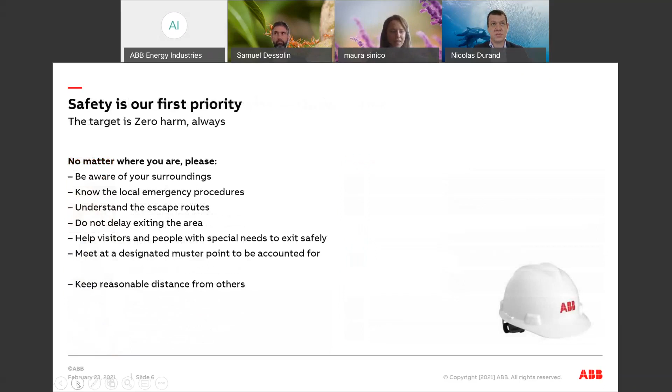Before introducing this formulation and blending tech talk, I would like to introduce very briefly ABB Energy Industries, as we are part of this division. ABB Energy Industries has the mission to support you in safe, smart, and sustainable operations through solutions that digitalize, automate, and electrify industries. We are in charge of 4 domains: oil and gas and chemicals, conventional power, alternative energy, and water infrastructure.

And on these markets, we support our customers on an offering portfolio which is quite wide, and that we will describe in more detail on the next slide.

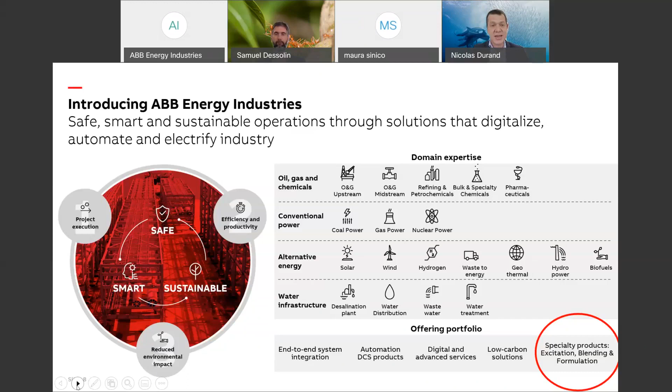So for this market, we can propose and support our customer on integrated systems and solutions. You probably know our capabilities in terms of electrification, control, telecom, and digital. But we are also a leader in automation control systems, where we can propose different kinds of solutions according to your process and according to your market.

We can support our customers whatever their typology—end users, EPC—but also through different channel partners that have been identified according to the different markets.

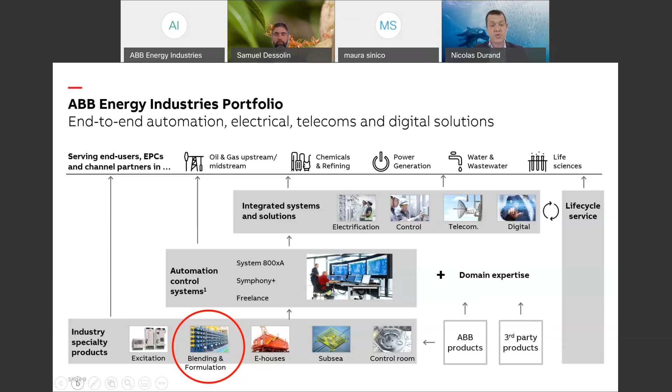In addition, with this integrated system and solutions, we also have some very specific capabilities in industry specialty products. For example, excitation, E-houses, subsea, control room, and of course, blending and formulation, which we will describe in more detail in the coming tech talk.

If we introduce now the Cellier Blending and Formulation solutions, we have been part of the ABB organization for about 20 years, but we have 60 years of experience in this kind of business. Since that time, we provide expertise, proprietary technologies, and our experience to design, engineer, assemble, and commission complete solutions and process control systems. Our solutions can be provided as standalone units, but also as complete integrated systems in the markets of lubricant and grease, paint and coatings, specialty paper, and chemical industries.

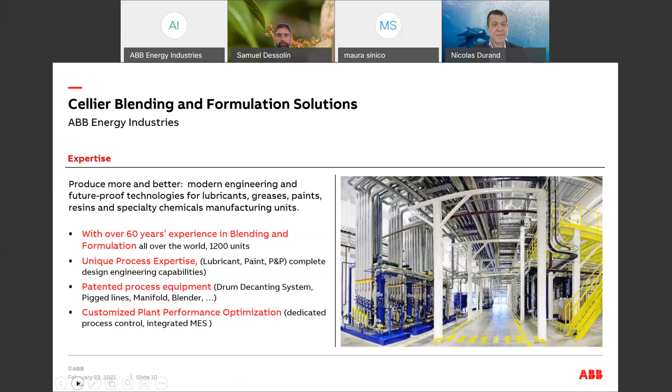Today we will go through the journey of presenting the ABB offering around blending and formulation expertise. Here we have summarized the different topics that we will address.

The heart of the plant is this process knowledge that we have with our engineers, batch or inline processes. We are capable of providing you with our own in-house solutions, but also we listen to our customers, to their process engineers or their own licenses, so that we cope with your needs, integrate your specificities, and deliver a full solution.

We'll touch base also on the after-sales service, which is important in the life cycle management of your industrial asset. And of course, we provide fully automated and instrumented plants to have an overall control on your process. We'll also touch on our digital module called ABB Ability Plant Performance Optimization.

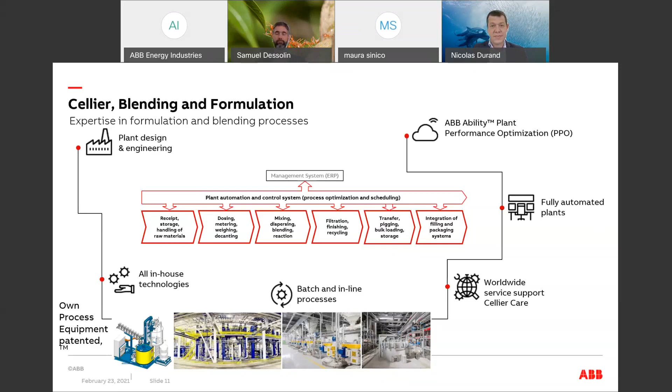On this slide, I won't spend too much time, but the idea was just to show you some examples of the many references that we have worldwide. We have more than 1,200 units built worldwide in the different markets that we serve. So here are some examples of the customers with whom we have worked and the markets on which we have been involved.

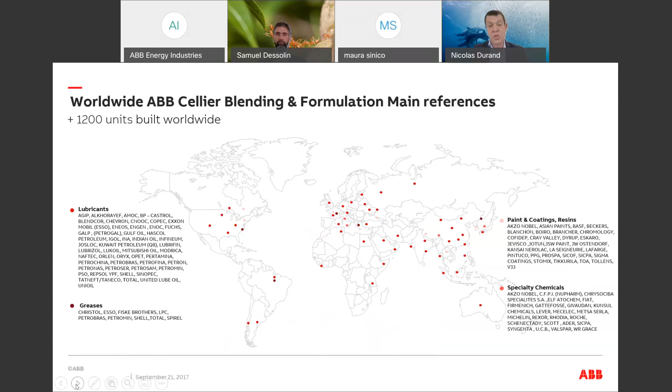What is important there, as you can see, is that we are global. It means that we can support you, whatever the localization of your plant or your project.

To continue the journey today, we will first touch base on our engineering capabilities. Basically, we are here to support you all along your project life cycle, and it's particularly true in the early engagement phase that we mentioned here.

Whenever you have a decision on an investment to be done, whether a brownfield or a greenfield project, we can be your partner from the beginning, for example at the conceptual design phase or at the FEED or basic engineering phase, to address with you your technical or financial challenges.

For example, identifying the risks, defining an overall project schedule, working on the different technologies that we can provide or select with your teams. And also on the financial aspects, define the return on investments or phasing your project in different steps so that you get the best out of your investment.

Then in project execution, during this phase we provide our detail engineering for the own equipment that we supply, but also for the rest of your plant, particularly in partnership with your other vendors or your EPC contractor, to ensure a smooth collaboration and a smooth project execution.

We also have some competencies to be your partner for the certification processes, for example in different countries, in Europe for the CE marking, or in the US, or in Russia, or China, or Korea. We provide you all the documents that are necessary for you to get the authorities' approval.

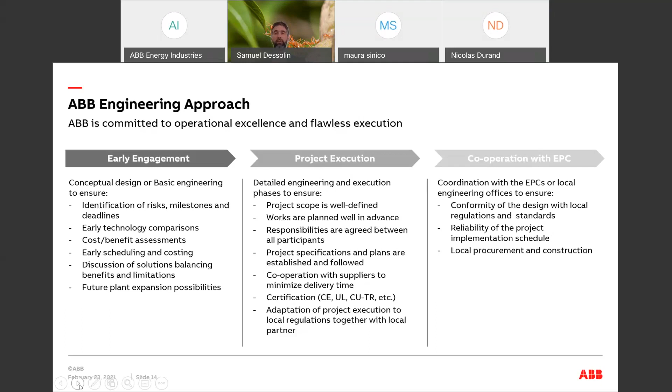We are also keen on applying the local standards, either thanks to our ABB local representation, or as seen on the right-hand side with the EPC or the local subcontractor, we adapt our design to the local norms and regulation. We also integrate as a team together with our end customer and the EPCs for the implementation of the project schedule. Now we'll go more in detail into our engineering approach.

Basically, all our solutions are usually skid mounted or even modular solutions.

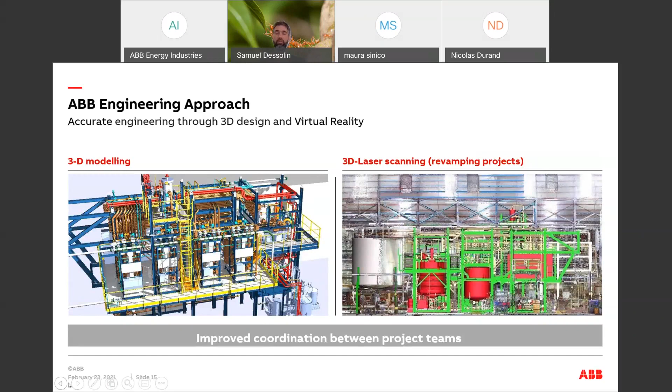This is done before starting the manufacturing of the skid. So it's a good way to control the design and be sure it will fit for purpose on your existing facility.

We also have, in France at our center of expertise, a workshop facility where we can manufacture equipment. The idea is to be in the innovation and R&D field, to promote and propose very high quality technical solutions. Having the engineering office next to the workshop is a better way for us to integrate and develop our innovations.

We also have a testing facility, particularly dedicated to improving or fine-tuning our products, and to run tests to define the performances we will meet in our contractual engagement.

Here it's in final stage in our subcontractor workshop. Again, it's all included with the pipes, the instruments, cabled and wired, even with the electrical cabinets, the MCCs or the VFDs. So it's a way for the customer to do an acceptance test in the workshop, to test the I/O, and to test the on-off and motor rotations.

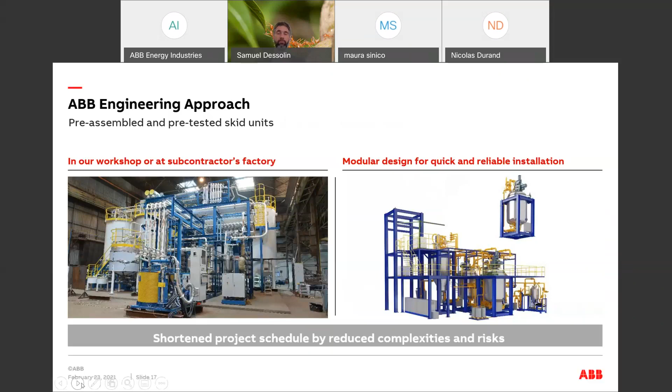And then afterwards, this is disassembled, packaged, and shipped to site in containers. Easy to transport, then reassemble at site with your EPC or local subcontractor under the supervision of the ABB team. So it's a way for you to construct safely and with limited risks at site.

This is both to supervise the installation of our own equipment, but also to give you advice and added value for the overall construction—having checklists, checking quality or timeline, or even raising punch lists—so that you and your EPC contractor can smoothly construct your facility.

Then on the right-hand side, for commissioning and site activities, we delegate our people to ensure a smooth startup. It's also a way for your people to get trained on the field, hands-on with the equipment and the control system. So that's for the engineering capabilities.

Here we have captured in this slide the overall project management capabilities that we have put in place for many years, and that we have accelerated now with more and more modern ways of working.

So here, just to summarize, the traditional way of project execution really has sequential phases: design, execution, and operations. Now we have captured the best of the Cellier know-how and ABB competencies to run this ABB adaptive execution.

So it's basically based on some collaboration up front during the design phase between the different ABB teams in the local country with the French experts, also together with you or your EPC, by organizing some key milestones during the project execution, like the hazard reports or hazard reviews, like the 3D reviews that we can now also run virtually, no need to meet all together in the same place.

And it's even more important with the travel restrictions that we have right now. The digital aspects are also, for example, for our control system. Again, we can run what we call remote FAT. We also have a simulation mode so that we can test our control system with a simulator of the process and how the plant will react at site.

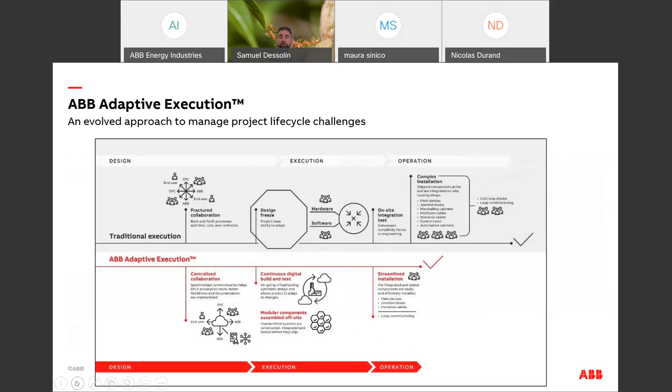And for sure, the modular and skidded type of construction that we propose is a key advantage for you for your site activities. So now that we have dedicated some time to engineering and project management, we want to focus on our offering. What project, what product, what solution, what can we offer?

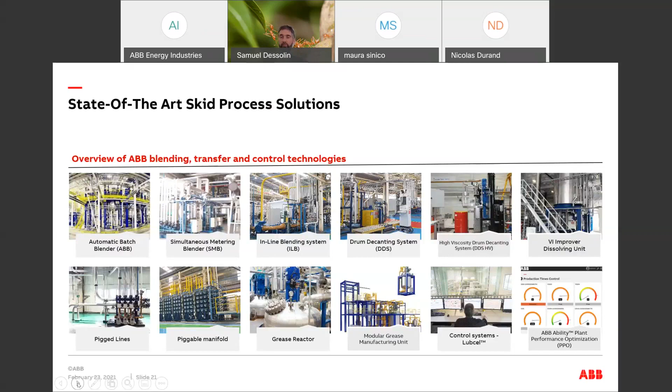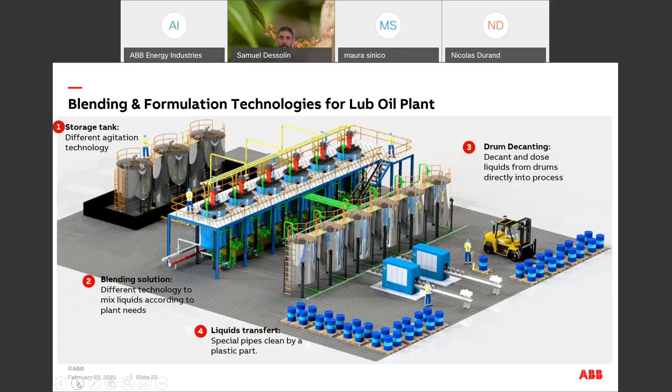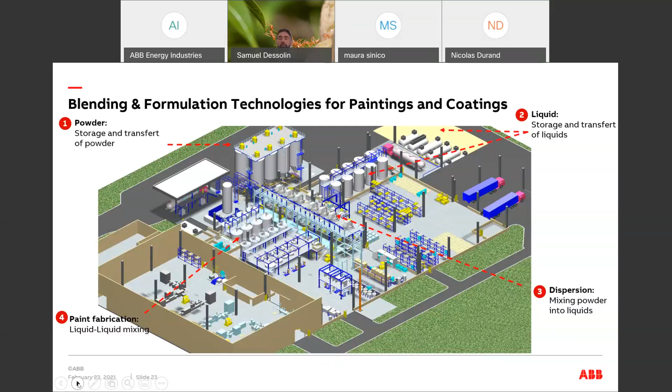All those plants for sure are controlled by our dedicated control system.

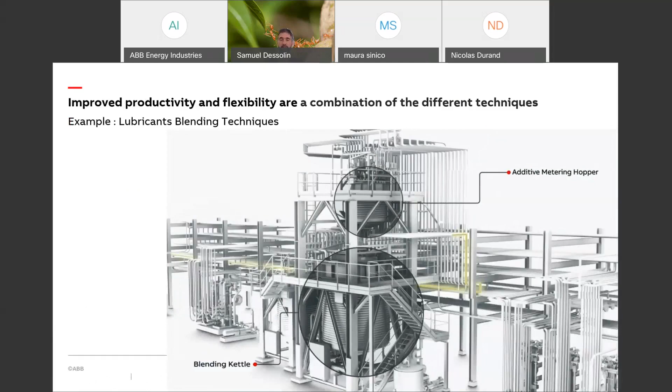So here, a 3D animated view of a typical blender. On the bottom part, you have the main 20-ton blender, and on top one is the premix dosing kettle.

So basically, we dose the raw materials one after the other. They are weighed on weighing cells, and then we add on the raw materials, so base oil number 1, base oil number 2, and so on.

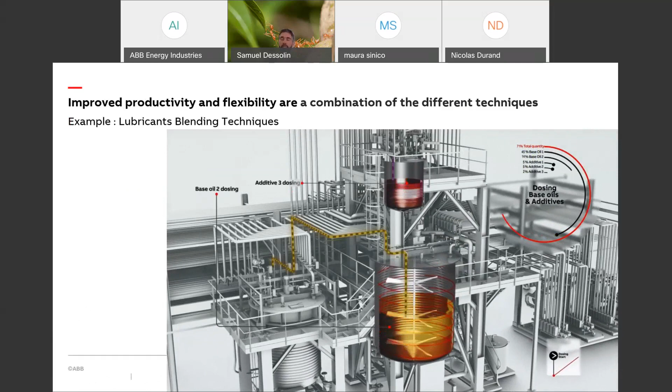And on top, on the small kettle, the additive is dosed also in parallel. So it's a way to optimize the batch duration.

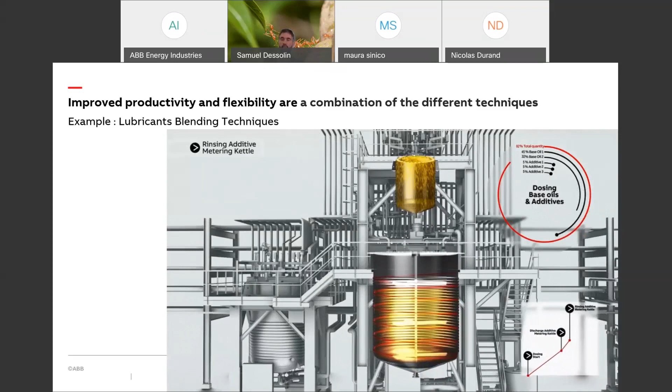So now the small kettle is emptied into the big one. We continue stirring and warming up the mix altogether to achieve the end finished product specificities.

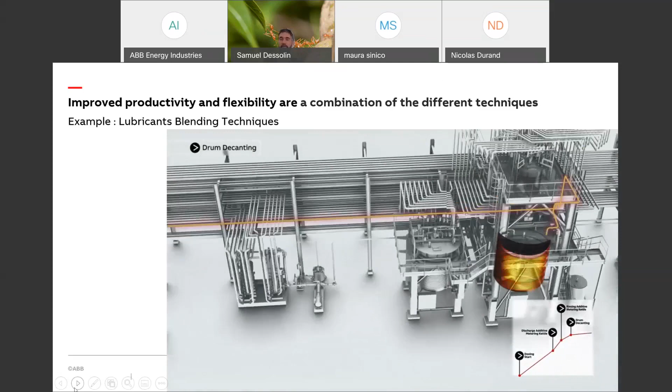And then here we see the final dosing through the drum decanting system that will add the last additive into the recipe. Once the product is on spec, we can test it with the lab testing.

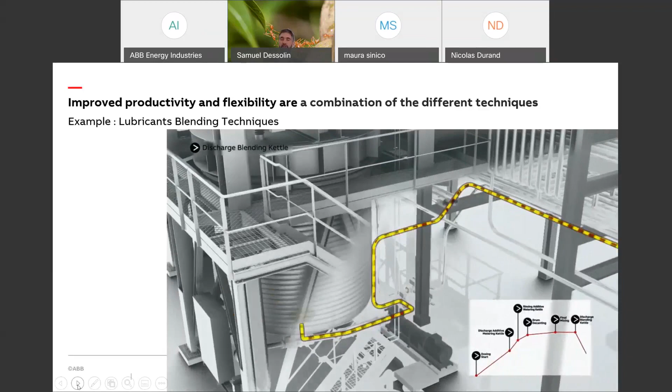The product is then sent out to the finished products. So this is a typical application of our batch blenders.

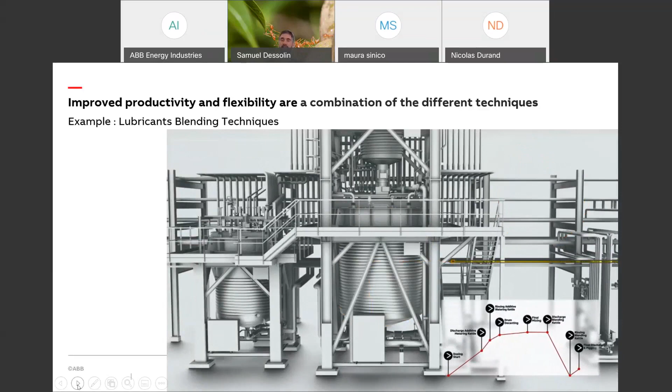And then, of course, at the end of the batch, we rinse the kettles, and this rinsing oil goes into the recipe, so there's no loss of raw material or product. It's a way to minimize contamination with the future batch.

So that was an overview of all our ongoing technologies. Now we wanted to make a focus on specific ones, and as an introduction, we are here as a partner because we face the same challenges as you.

You have a portfolio of products that is widening, with high runner products but also very small batches that you have to produce. So here we want to cope with those requirements with very productive and very flexible industrial assets. As part of those latest technologies, for example, we talked about it earlier, is the drum decanting unit.

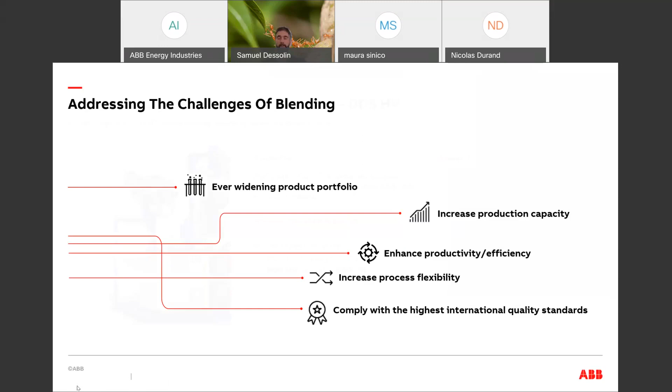So it's dosing and it's rinsing so that we optimize the utilization of this raw material. Of course, again, the rinsing oil is part of the recipe, so you don't lose any raw material.

And here, this new machine has a very high pumping capacity. With this new machine, we can go up to 20,000 centistokes. So it's a machine that is applicable in different sectors, again the lubricants or grease application, but also specialty chemicals. And here we can supply this machine also as a standalone unit.

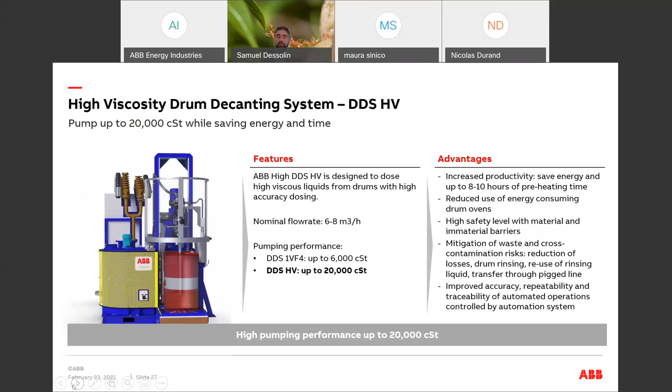The second technology we wanted to focus on is related to the pigging technology. Indeed, we have this portfolio of products, some valves and piggable lines, to cope with some of the challenges you have in your process plants.

Basically, with those piggable lines, we help you out in decreasing your capex on the dedicated pipelines, for example, from the raw material tank farm to the key blending equipment.

With piggable lines, we reduce the footprint of your piping, of your pipe rack, so basically the cost of your capex. Then, of course, these piggable lines have these cleaning possibilities.

So it's optimizing the use of your raw material or finished products into your lines to limit the loss of materials. With the cleaning sequence, it's a way of optimizing your production, and also with a minimum of maintenance costs on such equipment.

And ultimately, all this gain in raw materials or finished products, limitation of the slops or the rinsing oil, has an actual impact on the environment to help you reduce your footprint.

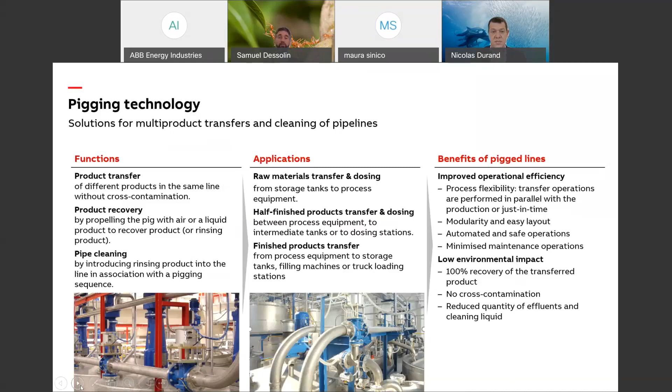So I'm done with the different technologies, hardware. I let it go with Nicolas for the software technologies.

Thank you, Samuel. Yeah, the last solution we wanted to introduce in detail during this talk is called the Plant Process Optimization, or PPO.

The PPO is in fact our digital solution to monitor and contribute to the optimization of your production units. It's a web-based application which is used to give you visibility on your production units.

It means that you first have a consolidation of all the production data which are available on your plant or coming from different plants, because this is also a tool which has multi-site functionality.

This data can come from different DCS, PLCs, or field instruments, or even ERPs. And then we offer to analyze and give you visibility on these data through different dashboards or different KPIs that help you to understand more in depth the production or the quality of the production of your unit.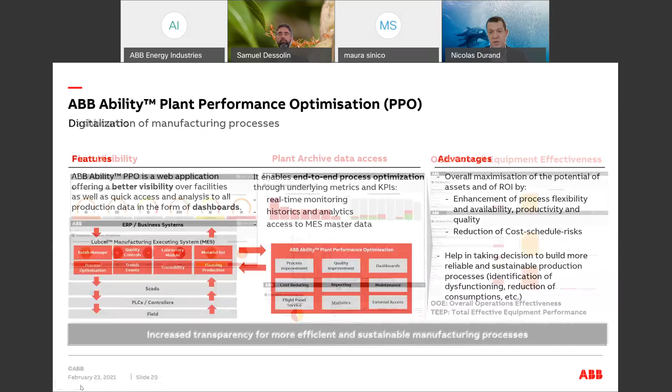This PPO is based on different modules. It means that depending on the functionalities in which you are interested, you can start with some modules and then add other ones if necessary. You see a presentation on these different modules in the red square on this slide.

So for example, process improvement or cost reducing, flight panel services, and so on. So the main objective, or main advantage of this solution, is to offer better visibility on your facilities and also to organize the information which is normally available on the site, but organize it on relevant dashboards and relevant indicators so that you can take decisions and improve availability or efficiency of your production units.

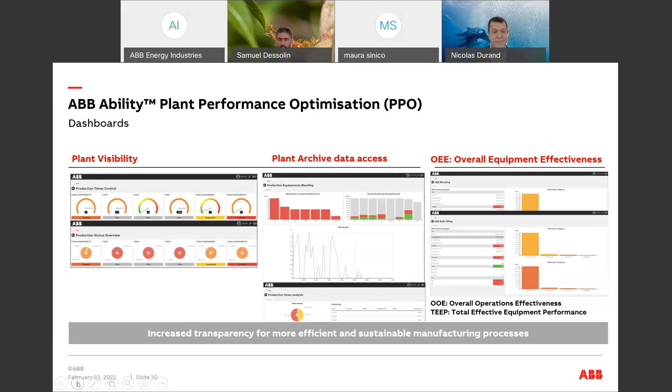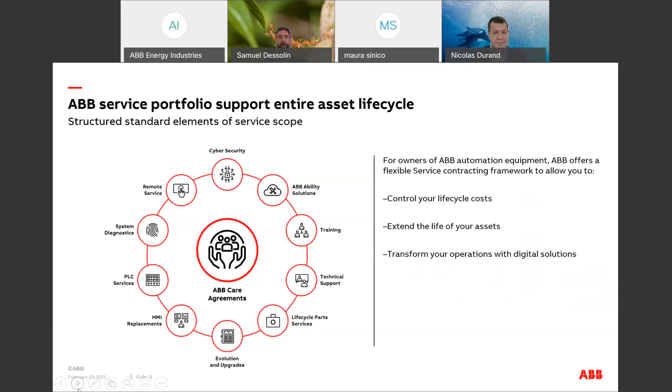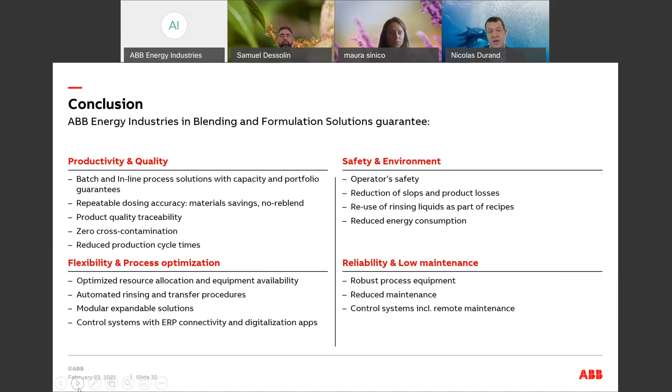I won't go through this entire list, but let me highlight some of them. For example, in productivity and quality, you have seen this in the presentation done with Samuel, with the drum decanting unit offering repeatable dosing accuracy or zero cross-contamination with the pigging solution we can propose. Also, with the PPO and the visibility it gives on your process, it can be used to reduce production cycle times. The same applies to the other pillars listed: flexibility and process optimization, safety and environment, and reliability and low maintenance.